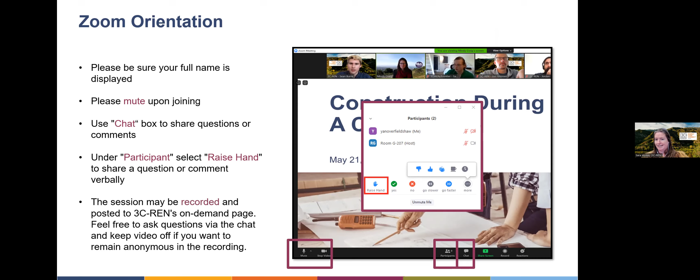So a few words about us for those of you that might be new. We are the Tri-County Regional Energy Network, also known as 3C Ren. We are a collaborative partnership between San Luis Obispo, Santa Barbara, and Ventura counties, working to improve energy efficiency in our region by offering free programs and services for building professionals and households. We currently offer 3 programs.

Another program we have is our building performance training, which serves building professionals such as architects, engineers, contractors, and real estate professionals by offering technical and soft skill training related to building science principles, high performance buildings, marketing, and communication techniques. And then we have our home energy savings program, which incentivizes contractors and helps residents save money and make their homes healthier with energy efficient upgrades through incentives and rebates.

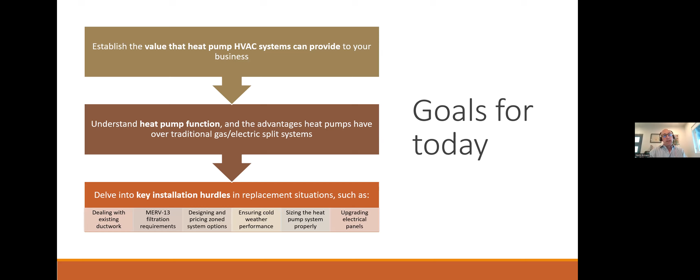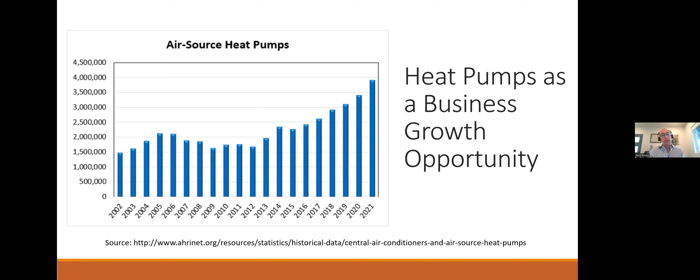So let's start with the business proposition, the value case for you to engage more with heat pumps. First of all, this is the national AHRI chart of heat pump sales growth. You can see it's considerably ramping up. But I like this next chart even more. This came from the Heat Pump Forum that the California Energy Commission hosted earlier this year. I went to the one in Newport Beach, and look at that - the market share of heat pumps in single family new construction almost doubled in 2 years, from 30% to almost 60%. That's unbelievable growth for any sector, really. To go that high in 2 years is really incredible. And I think the data is very believable because it comes from the CF1R forms that we submit for Title 24 compliance to the CHEERS registry, so it's really a perfect way to measure the change in the market.

Are you seeing that, Bobby? Does your experience back that up, that home builders are adopting heat pumps in higher numbers than before? Yeah, in California, we have a new set of codes. We're going by SEER 2, and most manufacturers are already set for SEER 2. And as fast as they can build them, they're selling them. So that's what we're seeing.

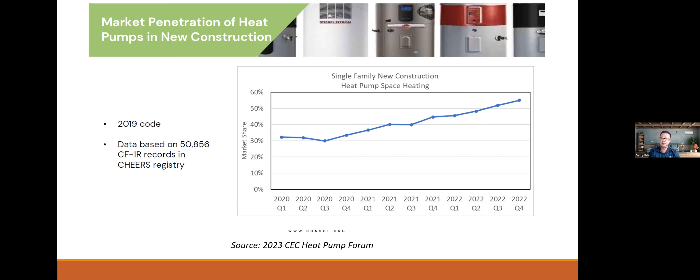We wanted to start up front. We used to have this slide when we taught this class three years ago and heat pumps were a little fringier, only 30% market share. We used to have this back towards the end, but I moved it up front today because I think many of you may be here because of these reasons.

We need to remove carbon from our buildings in California, residential and commercial. It's not enough to just slap solar panels on a building—we need to remove the systems that consume fossil fuels. The fact is, our climate statewide is ideal for heat pumps. Sierra Nevada installations are going to be a little different than the rest of the state, but there's so much heat in the ambient air that heat pumps can harvest. We're in a great spot.

They're the way to take fossil fuel out of space conditioning. Most homes have typically had an electric air conditioner for cooling and a gas furnace for heating of some sort. Heat pumps do both functions with electricity, with no need for the gas line.

We find also that our legislature has embraced greenhouse gas reduction goals fully, and all-electric homes have roughly half the greenhouse gas emissions of mixed fuel homes. This was something I was not aware of when I started in the business—I remodeled my own home with a gas furnace and a gas tankless water heater, thinking I was making a wise decision. But now that we know our grid is going to 100% clean, emission-free electricity by 2045, it makes no sense to continue to build or remodel existing homes with fossil fuel systems that can't benefit from that greening of the grid.

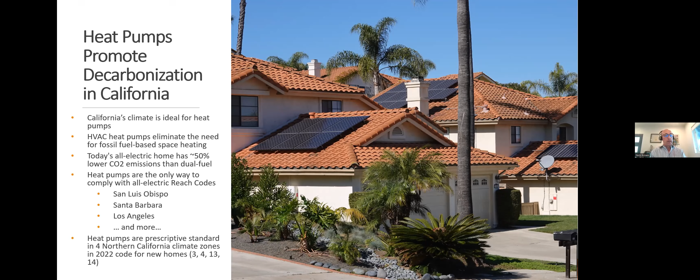We've also got prescriptive standards that changed in the 2022 code, which we're now eight months into. Climate Zone 4 is some of your territory, Sarah, and 3C REN territory, but also 3, San Francisco, 13 and 14—a lot of the Central Valley into Lancaster in Southern California. From what we hear, heat pumps are likely to become a prescriptive standard just about statewide in the next code cycle.

Here are some of the goals that our legislature and executive branch have committed us to in California: greenhouse gas reduction economy-wide, in the building sector in particular. Notice SB 100, that's 100% carbon-free electricity by 2045—really important that the legislature did that in 2018 so we could all be focused on the long term. And money like SB 1477, Tech and Build for incentives, not to mention the federal work—the IRA brings even more incentives to electrification of space conditioning. So there's just every reason to embrace heat pumps.

Hey Nick, I have a question on the last slide if you don't mind going back. The CARB slide—no gas furnace or water heater sales by 2030. I think that was added. Is that including replacement, or is that just new construction? Yeah, that's no sales in the state by 2030. Wow, that's not far off. Yeah, so if you put one in now, it's going to be obsolete in a couple of years down the road. It's hard to keep up, isn't it, Bobby?

Because we tend to focus on the California Energy Commission and Title 24, but we've got the Building Standards Commission and their CalGreen Code, which does important things in various areas. We've got CARB making their own policies, the Air Resources Board, and the various AQMDs, the Air Quality Management Districts. So there's all these different levers that advance us on heat pumps and greenhouse gas reduction, and it's hard to keep up, not to mention the federal level. In three years, this slide really changed—it's getting pretty full. Okay, thank you Nick.

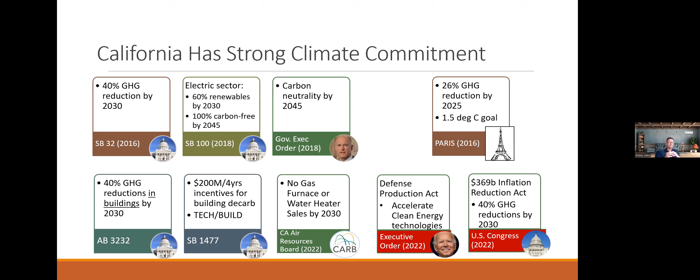And here are some of those REACH code jurisdictions. Most of them originally passed their REACH codes in the last code cycle, 2019.

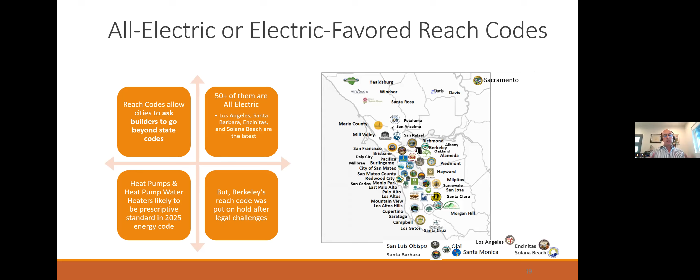New additions include LA, Santa Barbara, Encinitas, Solana Beach, and San Diego County getting in on the act. Heat pumps and heat pump water heaters are likely to be a prescriptive standard in the 2025 Energy Code, and CEC just had a stakeholder meeting on that. On the other side, Berkeley had a REACH code that banned gas in new construction, but it was put on hold after legal challenges. So there's still uncertainty in this area, but the clear signal is we're headed towards heat pumps.

So Bobby, this is you. Okay, thanks, Nick. Did you want to take some time to go through the chat, or should we hold off until after maybe there's a couple Slidos? Sure, did you see anything we need to address? Yeah, well, let's see.

It sounds like we have a good audience with Quit Carbon now, with 140 projects. This is one I didn't totally understand - Jurgen's comment about the current fad of tankless cutting off positive paths towards utilizing sun and means of storing energy. I think he might be talking about solar water heating, and the tankless path, since now we have heat pump water heaters in place. Agreed - let's put that in the parking lot for the end if we have time to talk about water heating.

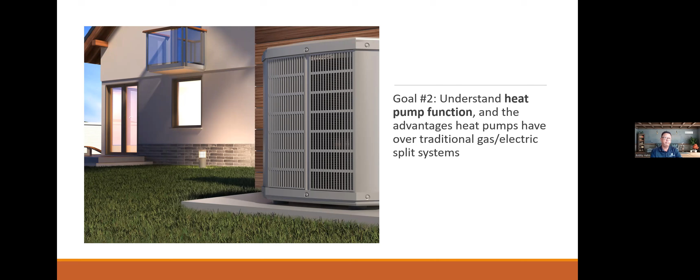So goal number 2 is to understand heat pumps - how they function and the advantages they have over traditional gas and electric split systems. We'll compare up to 4 different systems in just a little bit. We have a video that we wanted to take a few minutes to share with you. It goes through the reverse cycle and reversing valve of a heat pump, and it's important that everybody has a good understanding of how these work.

So why don't we go ahead and run through that video, Nick? Yeah, I forgot to hit the share sound button, so I'm just redoing it. Okay. Seeing that okay? I see it, great. All right, let's do it.

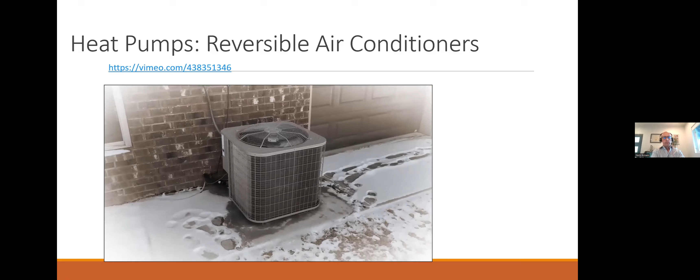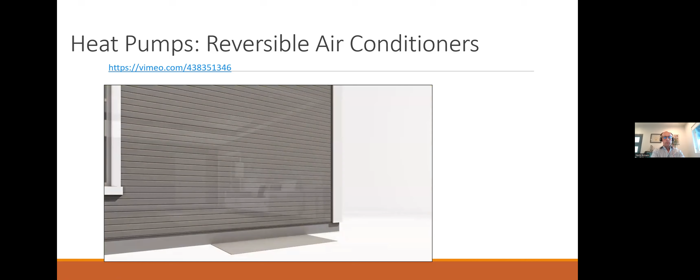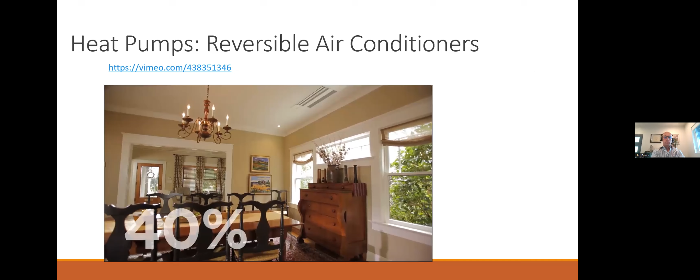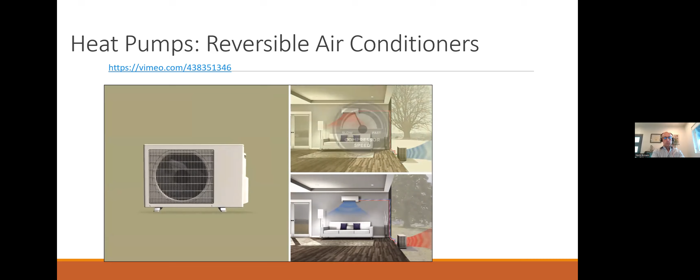In the past, conventional electric heat pump systems were known for their poor efficiency and performance in cold weather temperatures. Today, advancements in modern variable speed heat pump and zoning technology give everyone in the home year-round comfort, even in sub-zero temperatures. Here's how they work: ultra-efficient variable speed heat pump systems consist of an indoor air handling unit and an outdoor condensing unit, connected via 2 refrigerant lines. Working as a system, the units efficiently transfer the desired cooling or heating energy to each personalized comfort zone. In summer, air conditioning is produced when heat energy from inside a home is absorbed by the system's refrigerant and transferred to the outdoor air. In winter, the refrigerant cycle is reversed and the system extracts heat from the outdoor air and transfers it inside to heat the home. Compared to fossil fuel burning systems, modern variable speed heat pumps provide exceptional heating performance while being a greener, more environmentally friendly option. Variable speed inverter compressors use up to 40% less energy than past conventional systems by modifying compressor speed as needed to maintain consistent indoor temperatures - a feature conventional systems simply do not have. Some systems allow a single outdoor unit to control up to 8 indoor units for added comfort, efficiency, and style within a home. Ductless indoor units circulate and filter the air already in your home, resulting in improved air quality with whisper-quiet operation. Today's revolutionary inverter compressor technology is an impressive advancement in residential heating and cooling. These smart systems regulate energy consumption, using only the precise amount of energy needed to keep a home comfortable, saving the homeowner money while reducing our carbon footprint.

Bobby, I failed to plug in the video with the logos scrubbed out, I apologize. That's okay, it's no problem at all. Okay, so thanks for the video, Nick.

Now, how heat pumps work - this is almost the same video slide from the video you just saw. If you take a look on the left-hand side, this is the summer season, the season we're in right now, and it's been a brutal summer all across the country. During heat pump operation, we're expelling the heat from the space, thus cooling down the space.

That heat in the condensing unit is dispelling heat energy to the atmosphere. It shows the outdoor unit connected with refrigerant lines to the indoor unit - you see the red and blue lines. The penetration for both lines, being insulated, is only about the size of a tennis ball. Those pipes can fit through a penetration that small and connect both sides via flare nut fitting, and then you have a heat pump.

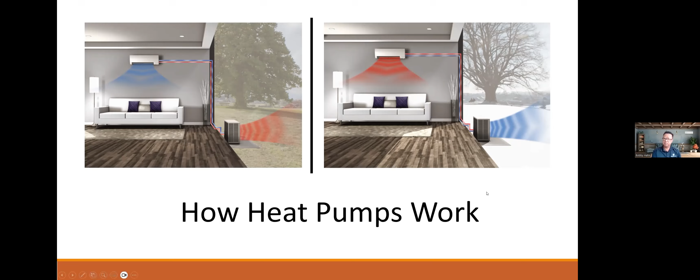On the right-hand side, you have winter operation, and this is all there is to it - utilizing a reversing valve, just reversing the refrigerant. It's harvesting the ambient heat in the air and pumping that heat into the space, using the exact same system, again utilizing a heat pump. So this video, this slide, and the last video simplistically show how heat pumps work.

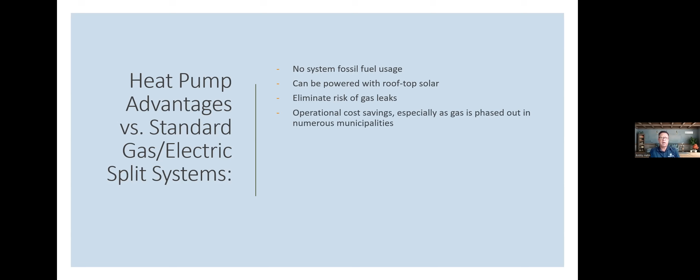Some heat pump advantages versus standard gas electric split systems: first and foremost, no fossil fuel usage. As we've seen, 2030 is the dead cutoff - no more furnaces. Heat pumps can be powered with rooftop solar, running off DC directly. However, we recommend having battery backup storage. They eliminate the risk of gas leaks - we all know how big an issue that's been, especially in Southern California. No more gas leaks, operational cost savings, and gas is being phased out in municipalities.

A lot of equipment nowadays, especially mini splits and VRF, the indoor unit can be powered from the condensing unit. So there's no need to bring power up into your attic or wherever you're putting your fan coil, resulting in much easier installation.

When Bobby says VRF, variable refrigerant flow, he's talking about what you saw in the video where your system ramps up and down in an infinite way to adjust the delivery of heating and cooling to the demand, instead of just being a jet engine that's on or off.

There's a couple different terms - variable refrigerant volume. Basically what we're using is an inverter compressor, which is different from a fixed speed compressor that kicks on and off constantly. As soon as it meets the set point, it goes off, then the compressor contactor pulls in and it ramps up to 100%. That's the old style condensing unit.

What we're talking about now, let's say you live in 3C-REN territory and it's not extremely hot - it's more like an accelerator on a car. So if you could see your accelerator going up, whether you want 87 degrees, 76, or 64 as your set point, it's just going to ramp up and down to that set point, just like an accelerator in a car. So it's much more efficient. We call it an inverter - you can call it a VFD driven compressor, but it's all the same, a variable speed compressor. We're getting much better energy efficiency, and it's a better way to air condition and heat.

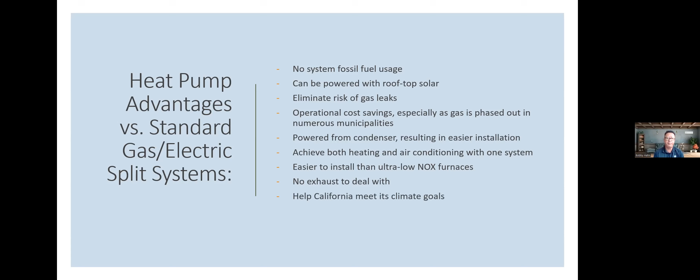Ultra-low NOx is required in AQMD territories, Bay Area, South Coast, basically all the way down to San Diego, which is the only one left. And then there's no exhaust to deal with. Going back to the top, elimination of fossil fuels means no gas leaks. With no gas, there's no exhaust to burn off. Ultimately, why we're here is to help California meet its climate goals, which other states follow.

So if there's one takeaway from my portion, it's variable capacity heat pump, VCHP. Write this down, this is being recorded. This is terminology used by the California Energy Commission. Variable capacity heat pumps modulate heating and cooling to match load, like an accelerator in a car. Your territory isn't the same as Palm Desert, which has a design condition of 122, so they have different loads to meet, whereas you'll have an easier load to meet. These units modulate, like an accelerator in a car. If it's not very hot outside and your territory maxes out at 80 degrees, but you still want 70 inside, it won't work as hard as it would in Palm Desert. Both the indoor and outdoor units are quiet.

I know a lot of this 3C-REN territory is by the ocean, so a lot of times when we have setbacks by the ocean for the outdoor unit, they prefer to have it around 55 dBs. We can get there with this type of equipment.

It has a longer lifespan than a traditional on-off type condenser, which is still out there currently. What happens is the equipment meets set point - for instance at 72, it hits 70-ish, 72, then it goes off. That's the old style. Then it gets to 77 degrees below set point, kicks back on, compressor contactor kicks on, and it does that the whole time it's on, going to 100% of its capacity - very inefficient.

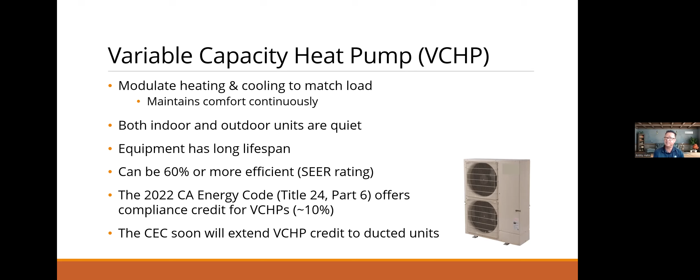In the world of 2019, yeah, sorry, I'm just looking at this. So in the world of Title 24, that is relatively new, but we're seeing it more and more. At this point, Nick, it's strictly California using this acronym. Is that just for Title 24? Yep, you are correct.

Thanks, Bobby. I just wanted to clarify that you can electrify your home with a simple heat pump. It doesn't have to be these best-in-class inverter-driven compressors, but that is the best practice, and what we're going to recommend for you if your budget can handle it.

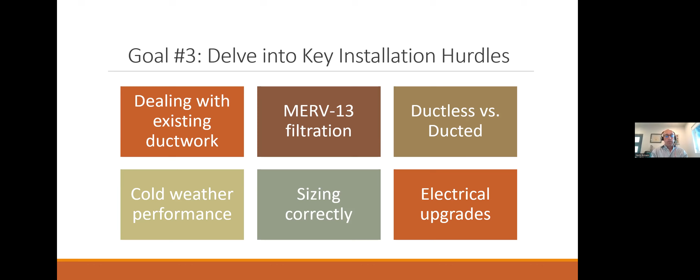We wanted to spend most of our time talking about these common impediments to adopting heat pumps, or at least things cited as obstacles: ductwork, air filtration, various configurations that are a little more complex, more feature rich, and this myth that heat pumps don't work in cold weather, as if we have much cold weather here that would challenge a heat pump, plus sizing and panel upgrades.

But first, let's go back to your Slido control panel. Let's ask you what challenges you encounter retrofitting to heat pumps, not new construction, but an existing home where you want to consider using a heat pump instead of a gas furnace split system. What challenges do you run into?

Bobby, how about you? What are the ones you hear from customers most? One is when they're using a furnace and don't have air conditioning, so there's no condenser, the panel upgrade to accept the power for the condensing unit has been one of the challenges, as well as whether we can use the existing ductwork.

But I think we're going to address that pretty soon here. I've talked to quite a few electricians at my own house, and I just had a 220 put in for a jacuzzi. They're just saying everybody's going to have to do these upgrades, it's just going to have to happen. Yeah, you're future-proofing your house for solar, EVs, load sharing, your car, jacuzzi, your dryer. There's a lot of different things that are going to be required.

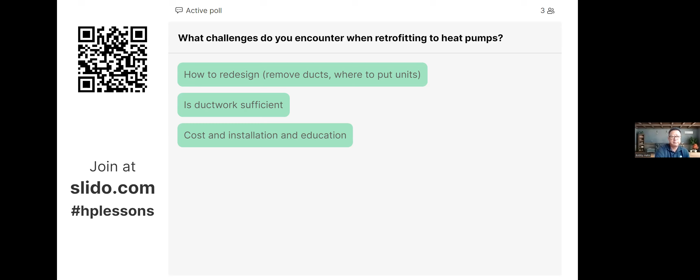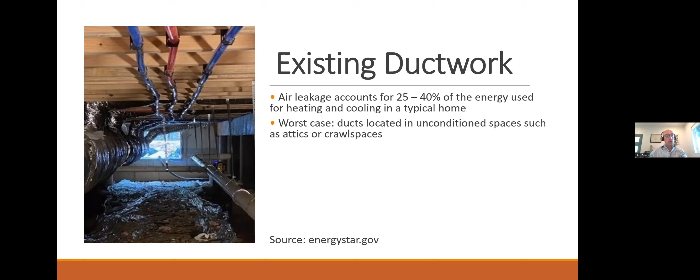So best practice is to move those ducts into conditioned space, where leakage becomes almost irrelevant, and your system can operate far more efficiently. Ductwork in unconditioned space adds to the capacity requirement of your system because you have to account for losses up there. So you may also be able to install a smaller system with ducts in conditioned space.

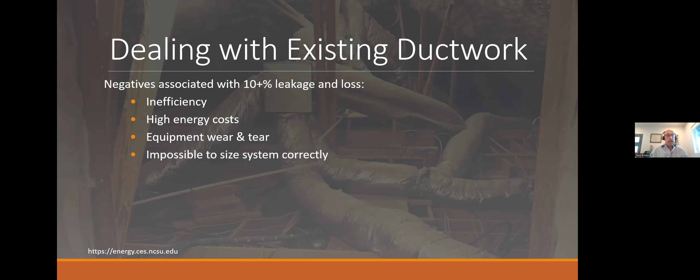But what if you can't move the system into conditioned space, can't do the best practice, and you're stuck with existing ductwork? Well, the Title 24 code provides a useful reference point: 10% duct leakage. When you have more than 10% duct leakage, your system's operating less efficiently, you've got higher energy costs, your system's working harder and longer, meaning it won't last as long, and it's very difficult to size your CFM, your airflow into each register, into each room, because you can't really predict where that energy is leaking.

All kinds of problems. Title 24, now in 2022, has set this 10% duct leakage target for altered duct systems where you're adding more than 25 feet or altering the HVAC system itself. The code says you need to achieve 10% duct leakage or less, or 7% to outside, just a different test method. And if you're unable to meet that 10% goal, you need to go through every single visible, accessible part of the ductwork using smoke and other tools and seal every accessible leak.

Which is considerably involved, costly, and complicated. So to me, that 10% goal provides a useful decision point. If you test an existing duct system and you're able to get to that 10% goal, that might be worth keeping. You've got a reasonably performing duct system. If you test it and you're well above that 10% goal, it might be worth recommending that the ductwork be entirely replaced.

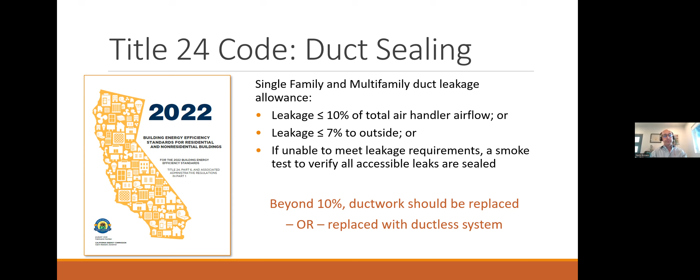Back to Slido now, for those of you in the business: what percent of the time do you see your projects reusing the existing ductwork? Hopefully most of you are joining Slido, this is important for us to understand as well.

This seems to be one of the major topics: do you really want to do this or not? If we have to replace all the ductwork, is it really worth the time, the effort, and the money? So far it looks like, most of the times we've taught this course, yeah, it's the dominant answer, over 75% has been the dominant answer.

Ted Tiles just brought up two important points, one of which you just addressed, Nick: if you're reusing ductwork and you have a leaky duct system that somebody else put in, if you can't fix it, you've got to replace it. And then duct sizing is going to be another issue you'll have to deal with.

I mean, the airflow percentage, are they close? Well, you want to assume that the prior HVAC contractor, when they designed the duct system to be compatible with the HVAC system and the air handler, got it about right. But that isn't a safe assumption, is it?

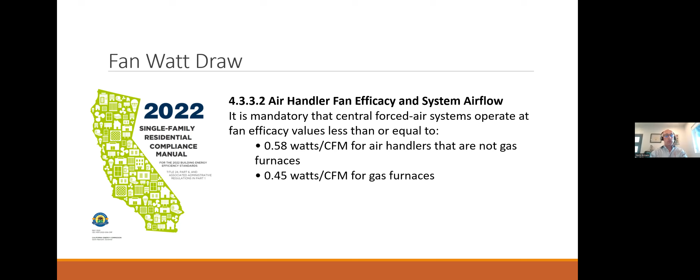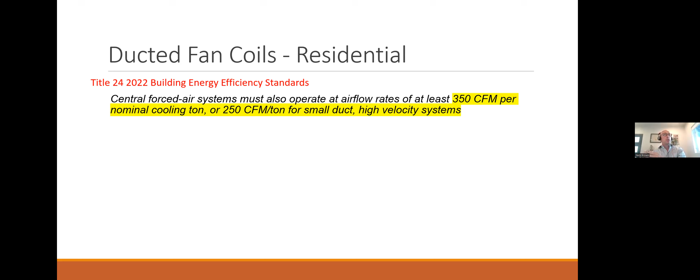And here's the 350 CFM per ton. We put these Title 24 requirements up here just so you're aware that when you're making retrofits of HVAC systems, there are a number of HERS-verified requirements that might nudge you towards a new replacement duct system, or towards a ductless system. Just wanted to make you aware of all that.

Here's another one. The 2019 code, for the first time, upped the requirement on return air filtration to MERV 13 for all ducted systems, including retrofit. MERV 13 is a standard that signifies to what extent that filter is going to remove common pollutants and allergens in the indoor space. This was an increase from MERV 6 or MERV 8, so it was a significant jump.

The reason the state made this mandatory is we don't have healthy outdoor air, so our best chance at improving indoor air quality and health outcomes is to better scrub the indoor air by putting in a very cost-effective MERV 13 filter. But it means there's more pressure drop across a MERV 13 filter, more resistance to airflow than there was with MERV 6 or MERV 8.

So in a retrofit situation you're likely to need to upgrade that return grill, and potentially add an additional return grill to spread out that resistance across multiple filters. That's another reason to consider modifying the distribution system, because you're going to be required to put this MERV 13 filter in it.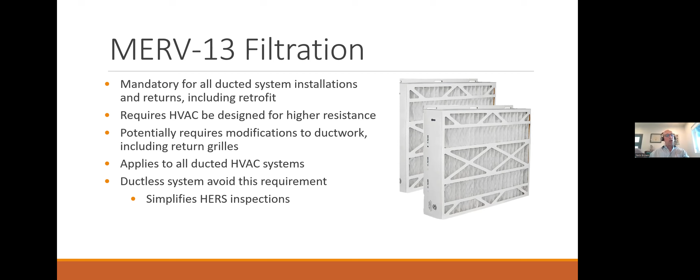Obviously, ductless systems avoid this requirement. Ductless systems have a fan built into the indoor fan coil, and because they run so much, they tend to do a good job of filtration. They're purring along there at low load a lot of the time.

I'd encourage you to use this not as an obstacle to HVAC installation or something to grouse about, but as a selling point. You can now show that as part of your HVAC services, you have the potential of improved health for that family, because the MERV 13 return filter is pulling out smog pollutants, allergens, bacteria, and virus — especially coming out of COVID. Something every homeowner should find really valuable.

That PM 2.5, that's diesel emissions, and we have a real issue with that statewide.

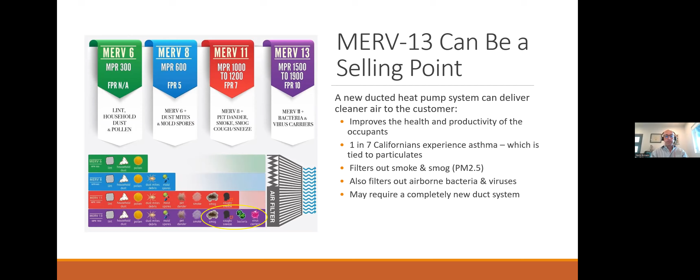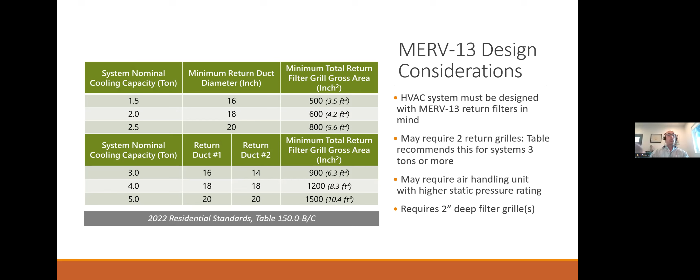Your HVAC system is also required to have enough return grill square inches to spread out that pressure drop, to make the MERV 13 filter effective and meet your 350 CFM per ton target and your watt draw. This table, while not required, offers a simpler pathway to avoid the fan watt draw test if you design your returns to fit it. Notice that at 3 tons, this table recommends 2 return ducts, 2 return grills.

Bobby, why don't you talk to us next about the various configuration options with these heat pumps? Sure, I want to put you on the spot in a sec, Nick. I'm ready.

On the left-hand side you'll see a colleague that Nick and I used to work with — this is a new installation in her home, a ducted mini split system or ducted split system. You can see there's an air filtration system right in the middle of the picture on the left, and that's basically a ducted direct expansion system.

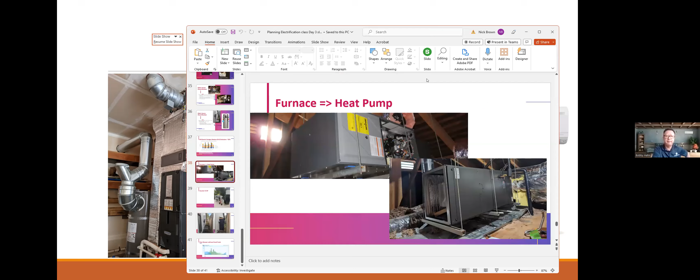On the right-hand side, Nick, if you want to show your new installation, now would be the time. Oh okay, yeah, I mean, because we could show it as a vertical. And Nick, you want to talk about this slide real quick?

Yeah, I just accomplished my own home electrification goal. The furnace in the upper left of this picture is what my attic used to have up there. You can see I was not following best practices — I had the air handler up in the attic, I had ductwork in the attic. That's an unconditioned, non-high-performance attic.

I'm in a similar climate zone to many of you on the Central Coast — I'm in Long Beach, climate zone 6. But the most practical, readily available, readily installable, lowest cost conversion to a heat pump for me was taking down that furnace and putting in its place a similar size unit that could interface with the existing ductwork system. We did have buried ducts up there in the attic, so that's what we chose to do.

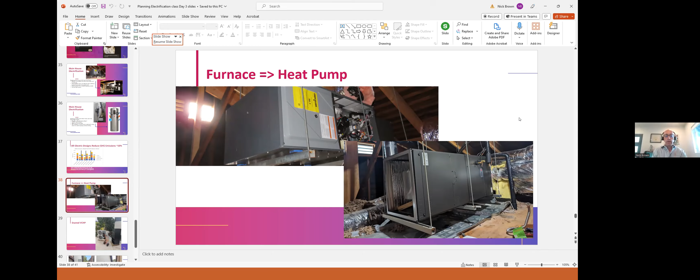Best practice would have been to go with a ductless system, but we're not made of money, and it got installed. I think I've got another picture here showing the indoor and outdoor unit for the 3-ton system we just got installed, and it's working great, purring along. I called the gas company to remove their meter yesterday, so that was good.

Oh, that must have been a great moment for you. Yeah.

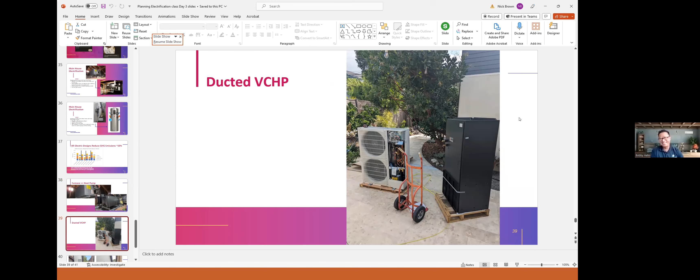So we have, just like Nick's new unit on the left-hand side, ducted — the one in the left picture is more like one you're going to have in your closet or garage. And then the right-hand side is something true to my heart, the ductless systems.

So there are many different varieties — floor-mounted units, high walls, which is the world's most commonly used form of residential air conditioning if you didn't know that, and cassette units as well. There are other variations of ductless units too, but one thing I want to mention is, like in Nick's application, he has a mini split ducted system.

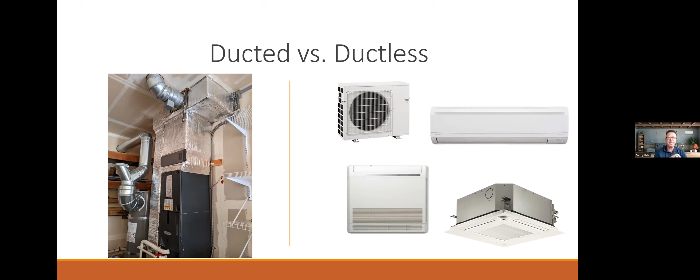So there's some confusion over ductless and ducted, but you can get both matched to the condensing unit. So the next slide is going to be Rick Chitwood. If you don't know who Rick is, he's a legend in the code era of Title 24, responsible for VCHP. We just saw in the chat, many people didn't even know what that was, but you will know what that is.

Very high AHRI equipment performance ratings for these ducted units. Also, oftentimes you can put the ducts and air handlers in conditioned space. For instance, you could be in a master closet and drop the closet, and you can have your ducts running from there. Or you don't even need ducts, you could just duct straight into the next room. And then you're going to keep the duct in conditioned space as well as the equipment.

High comfort levels. We mentioned earlier about the inverter compressor ramping, or the VFD-driven compressor, like an accelerator ramping up to meet set point and humidity. These also have great air filtration, particle removal. In a lot of cases, these are made for California. I can say that is the case of the equipment that I represent, that we do adapt all of our ducted units to MERV 13 filtration so they can handle the static.

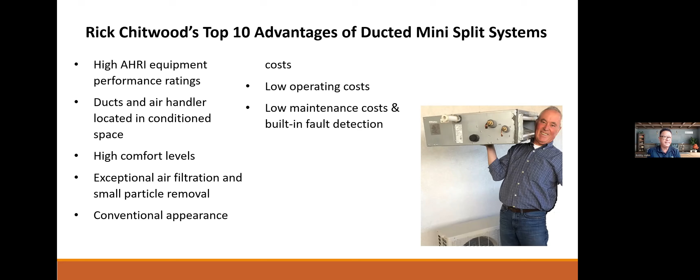So that's about it. Also, the last bullet point is built-in fault detection. You can put things like, give me a code after the unit's ran 200 hours, so I know to clean the filter. It will tell you if there's an issue. For instance, if it's low on gas, it'll give you a signal that it's low on head pressure, so you know to call your service provider and come out, and you have an issue with perhaps the refrigerant being leaked out or something like that.

So this slide I really like. This is almost like the slide from the video and the illustration of how the heat pump works. This does remind me of an application. I know Nick likes this example, that in Seal Beach, California, there was 3,000 units in a retirement home.

And some of the advantage, Edison was an energy provider at the time, and they had radiant heat inside of the wall and the ceilings. It used a lot of power. It was all electric, and it took about 2 to 3 hours to warm up the room. They opted to go this direction, and this is close to 20 years ago. And a lot of the advantages I'm going to mention now are some of the reasons.

One, there's no ductwork. You don't have your 30% duct loss running from your furnace to your furthest diffuser. There is no MERV 13 filter requirement. There is also no fan watt draw requirement because you have no MERV 13 filter. It does comply with the Title 24 variable capacity heat pump credit, that's 10%, that's larger than anything you can get.

This is important because I want everybody to know, like in the Seal Beach application, every bungalow had its own unit. There was no return shared air duct like you were going to find in retirement homes where you might have a common return and everybody gets it. Thus, everybody in the time of COVID got all the same air, they're all breathing the exact same air. In this application, everybody has their own unit, their own return air. They're not sharing any air with anybody else.

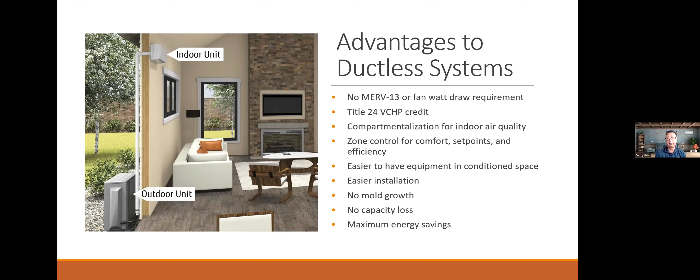Important to mention though, you do need to dispose of condensate with these indoor units. In this application here, it's kind of a perfect world application where you can take your condensation and water a plant. But if this is an indoor air handler, inside a wall, you're going to have to find a way to either pump it, which we don't suggest, or vertically feed the condensation into a drain, which we do suggest. So condensation is definitely one of the big application issues you want to consider.

This is something we're going to recommend that you go see your distributor for whatever equipment you like to purchase. At least the distributors I know, the larger distributors do not have any equipment that does not meet any of these SEER ratings, so you don't have to worry about it. But if you ever consider potentially buying a piece of equipment online, or maybe it's even overseas, there's a good chance that they may not meet the federal minimum requirements for 2023, and they're not even legal. So I suggest you go and talk to your distributors.

Basically, it's one point more. So if you see the split systems, heat pumps, current is 14 SEER, the new M rating is going to be 15 SEER, and the new M1 rating SEER 2 is going to be 14.3. It sounds complicated, but it's about a SEER point higher for us in California. Again, your distributor will know. I am sure that most of them have replenished their stock of anything below 14 SEER. I know on behalf of the distributor I work with, we do not sell any 14 SEER product heat pumps at all.

Ted's asking about Energy Star qualification and whether that might be required for IRA tax credits. It depends on the tax credit. For the Inflation Reduction Act, that's a federal tax credit, and I believe it has to meet a certain SEER2 requirement. But a lot of tax credits outside of the IRA will require Energy Star. There are a couple different websites with this information, but your distributor should have it for you. They'll tell you which equipment meets the criteria they expect you to use. Energy Star does qualify for certain rebates that some non-Energy Star equipment does not.

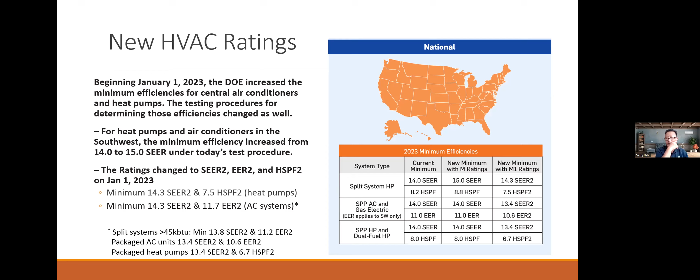Okay, I'm going to go ahead and give this back to Nick. This is a 3C-REN example, and I'll just hand it over to you.

Yeah, we found this house on Zillow or Redfin somewhere. We wanted to make it as real world as possible in Santa Maria. They shouldn't have a lush lawn like this, should they, Sarah? But they do. It's a 3-bed, 2-bath, 2,100 square foot house, and we chose that because that's the size of one of our prototype energy models. We thought, perfect, let's use this as a case study.

Let's say the current split system, gas furnace, air conditioner is at the end of its useful life, and let's consider various like-for-like replacement and heat pump replacement options.

Hey Nick, did I hand that over too early? Am I supposed to- Yeah, I think this was. I think I'm still supposed to be going. All right, take it back, sorry about that. Yeah, I'm taking it back, it's all mine. When we get to the economics, I'll cover it. Okay, thank you.

Considerations for like-for-like. This is what you're going to be walking into most of the time. You're going to have a like-for-like system. If they have an air conditioner, and it's in Santa Maria, likely they're going to need one.

First bullet point, we've been talking about this 30% capacity loss. Second bullet point, an ultra low NOx furnace is required, adding $350. Well, I can tell you that might go up from there, that's going to be a minimum of $350 for the equipment increase for the low NOx furnace versus just a regular furnace, but the installation could be much more than that. Not much more, but it will be more. MERV 13 is required, and then a HERS rater is going to come out and test for leakage, which is going to be required as well as checking for potential mold buildup.

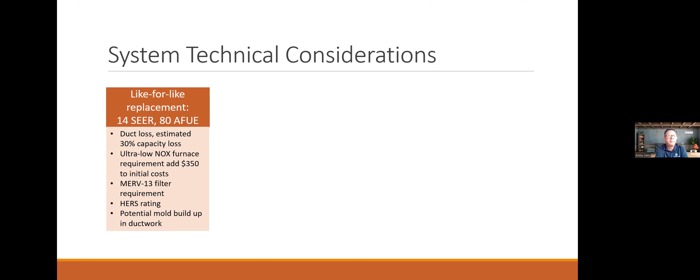The second system is a single stage central heat pump. We're going with 14 SEER. I know that with SEER2 we have to go higher, but in this example we're using 14 SEER. Again, we have a lot of the same: duct loss 30%, MERV 13, HERS rating, mold, and comparable costs to a gas split system. But here, because you're not using gas like the unit to the left, we're going to have up to a 24% greenhouse gas reduction. So that's very big.

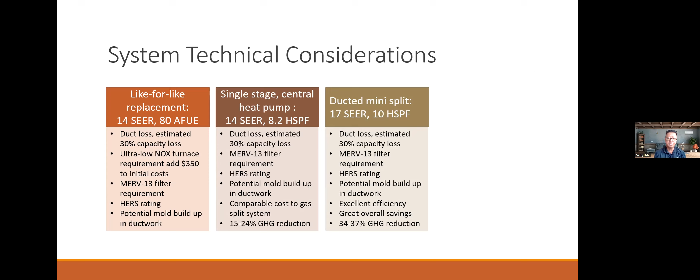And then we go towards the ducted mini split. This is what Nick put in his home: 17 SEER, 30% capacity loss again, MERV 13, HERS rating, potential mold buildup, great overall efficiency, and up to a 37% greenhouse gas reduction.

And then we go to the ductless unit. We just took a 22 SEER unit. We could have easily gone for a much higher SEER unit, which are out there, but the range for the mid-price ductless unit is around 22 SEER. So in this case, the 30% capacity loss is gone.

That's right off the bat, and we don't even calculate that number into a lot of our savings. That just happens automatically not having ductwork. No MERV 13 requirement, so that's gone. Since there's no ductwork, there's nothing for a HERS rater to do there, so that's gone. There's no mold buildup in the ductwork, and you're going to get your best efficiency using ductless units. Again, you have no wasted energy going through ductwork. And with this, you're going to get a 37% greenhouse gas reduction just due to the fact that you're not using gas.

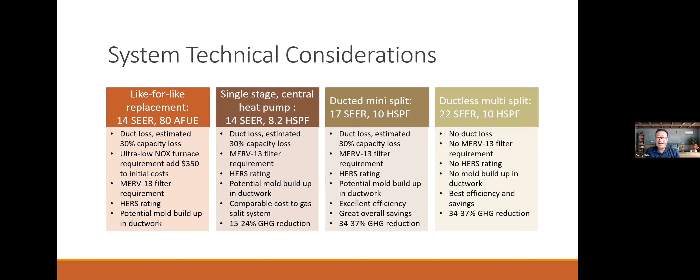This is what we do every single day. Our company does this, we do design work, and we work with companies like Nick to try to make sure we're compliant. But do ducted and ductless units work together? Almost every job we have a combination.

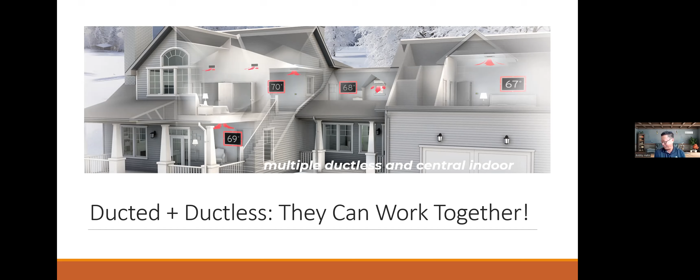So can they work together all the time? This kind of segues into the next slide, since it looks like wintertime outside, so we're going to get into some cold climate applications. But first, if anybody's been listening, hopefully you see some advantages of the ductless systems that appeal to you. Please feel free to share your comments on any advantages of the ductless system.

I could bring them up again. Oh, here we go.

Jurgen's right, if you're doing the VCHP compliance credit, you're going to need a HERS rater to verify that as well. So you don't get completely out of HERS verifications with the ductless systems.

I like that, you could vault the ceiling. We've done quite a few applications where we've had an A-frame church-type setting, where we'll just line up high walls along the side wall or use a floor mounted unit.

Zones is really, that's back to the application in Seal Beach. You have a high wall unit with yourself or your significant other in there, and you are not sharing return air with anybody else. So health-wise, that's very important.

Lower cost, yes, back to the tennis ball example. You're running two refrigerant pipes, a liquid line and a suction line through, and that's it. Although, to Jurgen's earlier point, when you get to 4 or 5 indoor units, you're probably going to be higher cost with a ductless system than ducted.

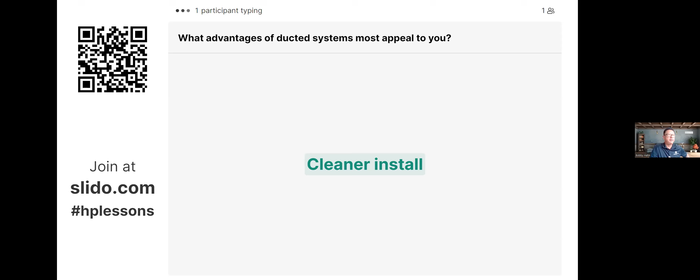Cleaner install, I'm going to just jump ahead. A lot of times, if you have ducted systems, and Nick did this too, if you want to change over and your ductwork is there, you could likely use it, and then you don't have to put in multiple indoor units.

Cold weather performance, I'm just going to touch on this briefly. In cold weather climates, before inverters, when I started, there were non-inverter mini splits, and they did not work if it was 30 degrees or below. They just stopped heating.

Now that we have inverter drives, and I know the terminology is getting confusing, but the inverter drives, whatever you want to call them, VCHP, VRF, mini splits, most all manufacturers do have cold weather units. And what we do is, since the compressor never stops, it continues to run. It flashes refrigerant into the compressor so it doesn't overheat, and it actually can spin bigger than its capacity. So we can go into very cold climates.

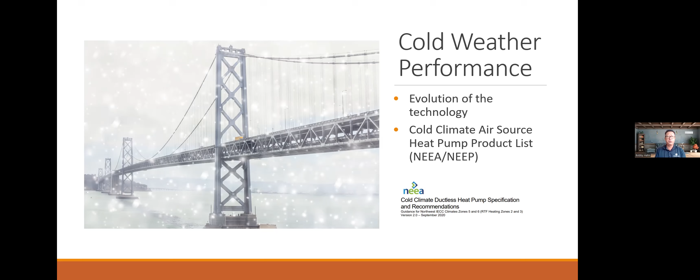So this is going to be applicable now that it's not your grandfather's heat pump anymore. The new heat pumps can operate in extreme weathers.

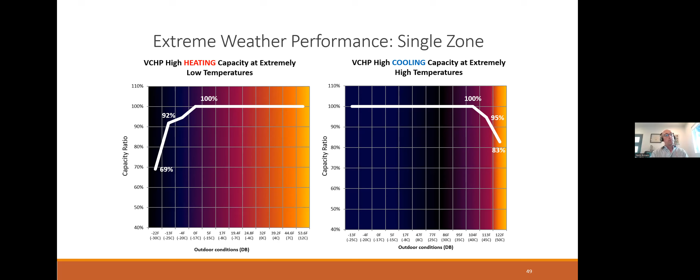Yeah. Like most myths that seem to persist, there was some basis in truth in the past, right, Bobby, about cold weather performance, but that's been worked out.

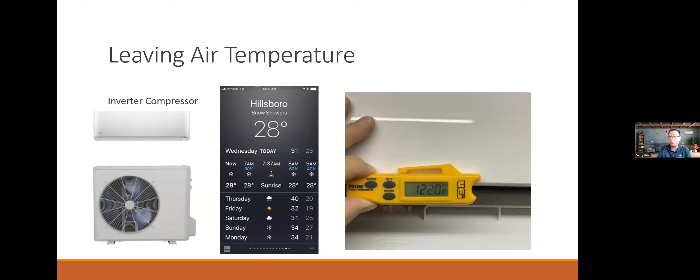Yep, and this is an example. This is a coworker of mine. His name is Dwayne. This is his house, and this is an air handler, just one of off-the-shelf air handler, nothing special. It's 28 degrees outside, at set point, and then it's delivering 122 degrees off the air handler. So it's performing, and they can produce that type of output.

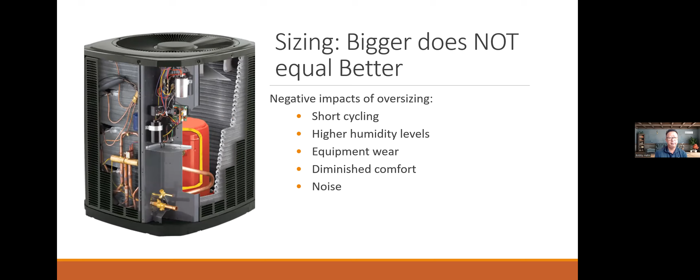One thing about sizing, especially California, bigger does not equal better. We've seen this in the past where the major impact is going to be oversizing. When you size the equipment too big, it's going to come on and off too fast. It's going to meet set point, back off, meet set point, back off. Your humidity levels are going to bounce all over the place. Your equipment wear, your condenser will die if you oversize it greatly, and it will diminish noise and comfort.

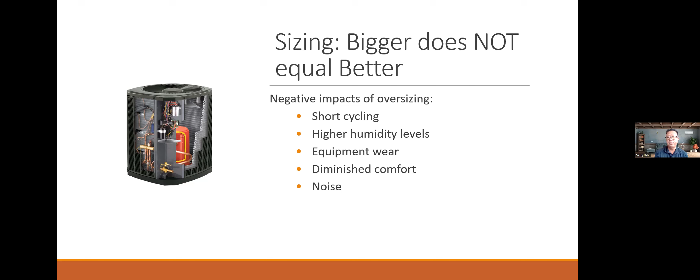So you want to make sure that you do all your calculations correct and you size the equipment correctly. And your distributor of your equipment will be more than willing to help you with that. So with that, Nick, I think now I can hand it over to you.

So yeah, don't size your HVAC system by rules of thumb. Don't size your heat pump system by what the furnace used to deliver in terms of heating. It's probably far oversized. Start by reducing load first with insulation and windows, like Sarah just did. Consider enhanced air leakage testing, etc. And then perform load calcs to really get it right.

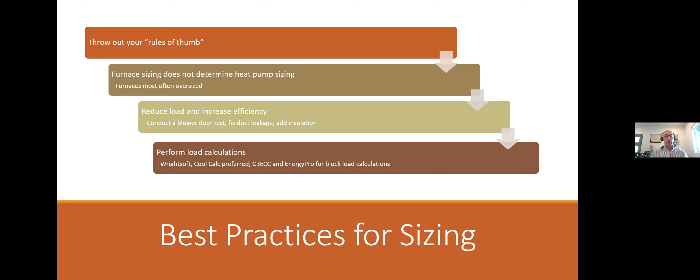So one of the last hurdles we wanted to cover was panel sizing. And as Bobby said, the biggest hurdle is when you don't have cooling and you need to find room in the panel to add a heat pump, because the furnace used to not require any electricity.

But if you already have cooling installed, you have the capacity for a heat pump. This is not an increase. It's a lateral move, right? Because you're still providing cooling and now you're just providing heating, but with the exact same energy use.

It's also really convenient that with variable capacity equipment, power goes to the outdoor unit and then the refrigerant lines and power lines go to the indoor units. So I was able to free up a 120 volt circuit for my old air handler in the attic that I don't need anymore, as an example.

And we need to anticipate that we need to future-proof our houses at this point. And so if you are in that situation where you're right at the edge of your panel space and you need to add heating and cooling with the electricity panel, well, you might think of that more as a future-proofing for EV charging and future solar panels and the other electric loads you're likely to need that we haven't invented yet. Don't blame it on the heat pump is the bottom line there.

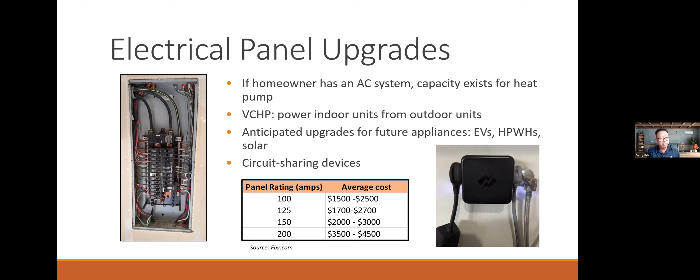So Jay, almost two years ago, bought a Tesla and he only had enough power for 220. He also had a 220 dryer that already had its own circuit, so he was able to circuit share. Whenever the dryer came on, it would kick off the 220 going to the car, and when the dryer shuts off after an hour, the car charging comes back on. So circuit sharing could be a big benefit, especially if you don't have enough power and need to run two different 220s at the same time off the same circuit.

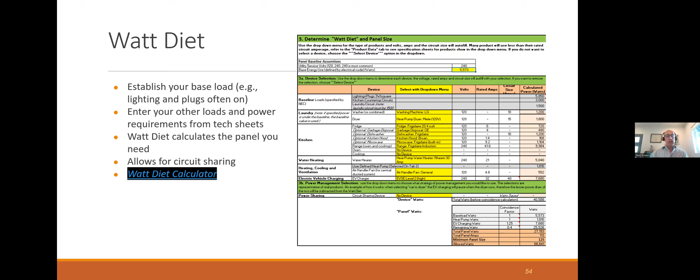Wanted to make them aware of that. Also wanted to make them aware of the Watt Diet tool, which can help you weigh in with your electrician on whether you have enough panel load, because it takes you through the NEC load calculations your electrician should be doing with your panel, and you can do what-if analysis on various heat pumps to see if you can fit it in under the wire.

We looked at first cost and utility costs, so basically total costs over 15 years for a like-for-like replacement, and those three heat pump scenarios Bobby did for you. The like-for-like replacement cost about $8,500, with annual utility bills of $2,500—that's gas and electricity, assuming a gas water heater. So they have roughly $45,000 in utility costs to run that house for 15 years.

A dumb heat pump, a central heat pump, has similar costs but qualifies for almost $5,000 in incentives today between the TECH program, federal tax credits, and the 3C REN energy savings program—check that out. The incentives go to the contractors, so you need to work with your contractor to make those come to you. But if you're a non-hard-to-reach customer saving 100 therms per year, that came out to $2,000, which is the incentive we used for all the heat pump scenarios. The utility bills went slightly up for the dumb heat pump, but with the incentives it was an $800 benefit over 15 years to the homeowner.

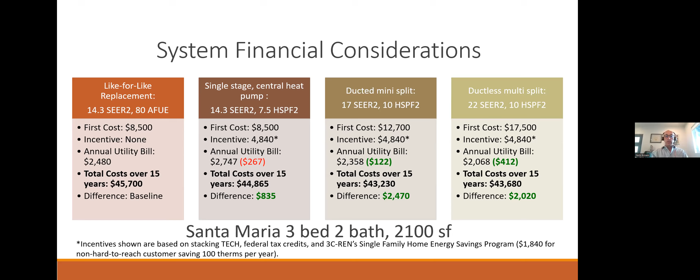The ducted mini split, though, has utility bills that come in under the baseline like-for-like replacement, so they're $2,000 to the good. Same with the ductless multi split—even though it costs $5,000 more to install for this whole home and doesn't qualify for additional incentives, the utility bill savings made it just about as good as the ducted scenario. Santa Maria has very little heating load in the energy modeling software, so those numbers are going to be even better if you're inland, like Paso, with a more extreme climate.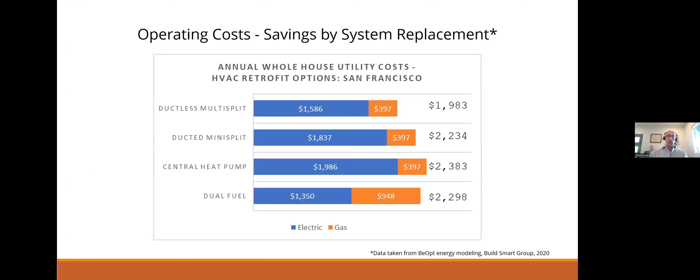And this bears out that there are significant utility cost savings with heat pump retrofits—not necessarily the central heat pump, but the best-in-class equipment. With today's incentives, which have never been better, now's the time to consider this advanced variable capacity equipment done in conditioned space if you can, because we find savings in San Francisco, in Walnut Creek, and throughout 3C REN territory.

Wanted to cover incentives too in a little bit more detail. Energy Smart Homes has an all-electric retrofit program and an all-electric new construction program, so check that out. Tech has $1,000 rebates to the contractor, with a larger one coming for the water heater. And 3C REN has their energy saving program—when I put together these slides, first time I'd seen it, I thought, wow, that's a well-designed program with some significant savings. And the federal tax credit, what we used to get on solar, is now extended to heat pumps and heat pump water heaters, and these all stack on top of each other in most cases. Not to mention the IRA HEEHRA program that can be $14,000 for a low-income customer.

So I don't know, Sarah, do you want to sum things up, or do you want to let people do these final Slidos? Yeah, if we could just skip ahead a few slides, I can run through my closing and then we can open it up for questions. Okay.

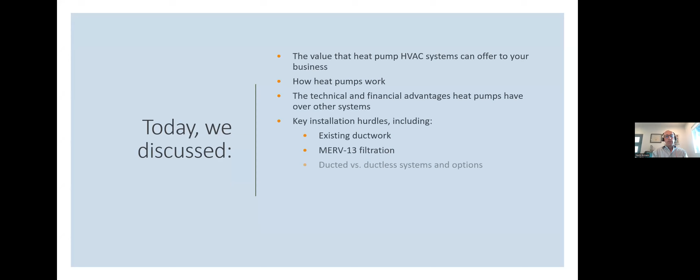Thank you. Just in closing, I wanted to highlight that 3C Ren has a programs and incentives tool that gives you personalized programs and incentives. I added a direct link into the chat, so you can go through, answer a few questions, and it'll provide not just 3C Ren programs but other heat pump opportunities, EV, and a variety of incentives in our area.